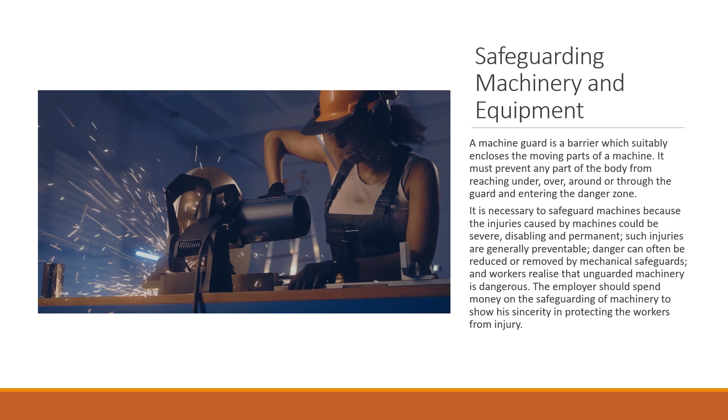Let's now take a look at the different classes and types of machine guards. There are two classes of machine guards: transmission guards and point of operation guards. And there are three types of guards: fixed guards, which do not move with each operation; interlocking guards, which prevent the control of the machine from being used until the guard is moved into place; and lastly, automatic guards, which prevent the machine operator from coming into contact with dangerous parts of the machine while it is moving.

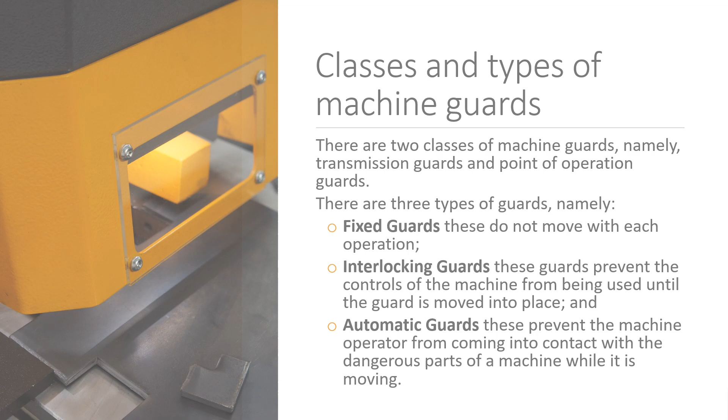When inspecting our machines as well as the machine guards, remember that machine guards should comply with the following requirements. They should afford the maximum protection possible. The danger zones should be blocked out during operation. The guard should be corrosion-free and fire-resistant. The guard should not produce splinters or pinch the operators. The guard should be fixtures of the machinery. The guard should not affect the efficiency of the machinery. And lastly, they should be strong enough to withstand normal wear and tear.

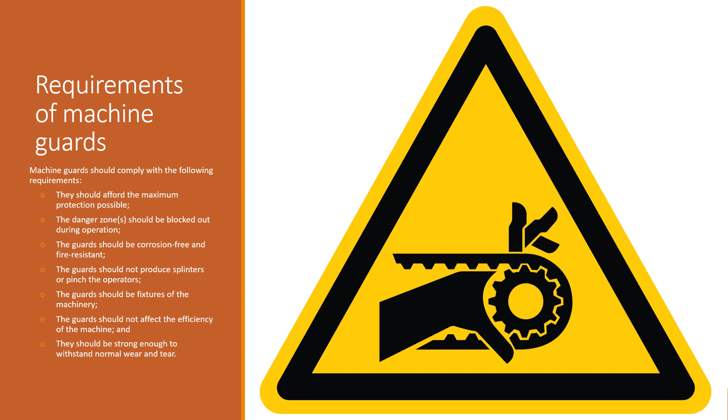Machine guards and safety mechanisms are designed to protect your hands and fingers. Never remove machine guards or bypass safety mechanisms. Check the lockout, tagout procedures before attempting to put your hands into machinery. Poorly maintained machinery, tools, sloppy work areas, and cluttered pathways all contribute to hand injuries. Good hygiene includes hand washing, which helps to remove germs and dirt from your hands. Clean hands are less vulnerable to infection and other skin problems, such as contact dermatitis.

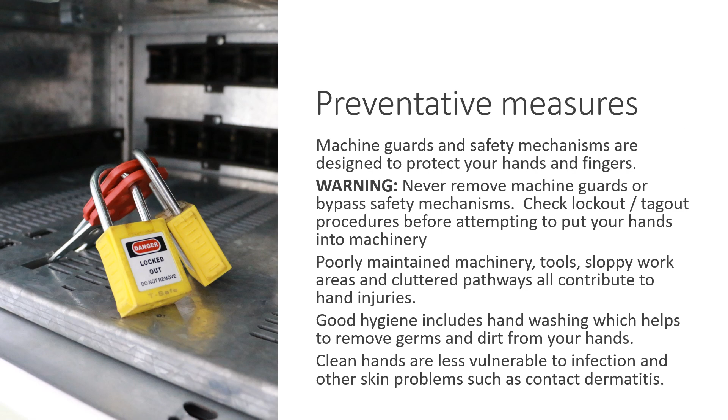Aside from electrically powered tools, you are often going to be using hand tools. Hand tools are multipliers of our strength, and they are like millions of willing hands working for our comfort. Primitive man had no tools but his bare hands. They caught his food, built his home, but one day someone discovered that with a stone fastened to the end of a stick, he could strike a harder blow than he could with his fist alone. From this beginning in prehistoric times, tools have been developed, enlarged and refined, but have never lost their importance.

However, hand tools are considered so simple that usually no one bothers to point out the right and wrong ways of using them, as well as how to take care of them.

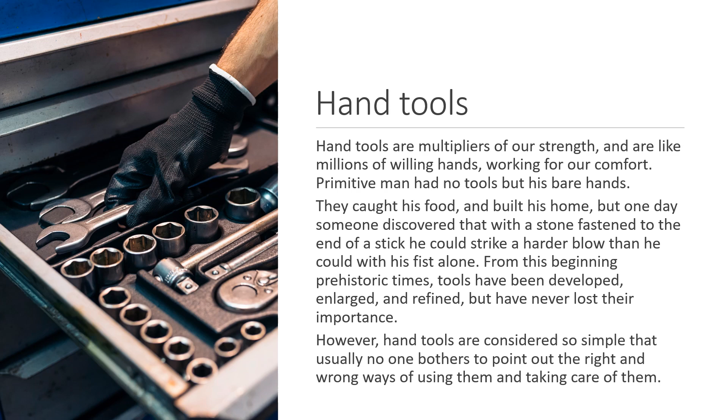Harmless as they look, they account for a surprisingly great number of compensable injuries in today's industry. Workmen have lost eyes or had vision impaired. Tendons have been severed. Bones have been broken. Arms, legs, and fingers have been infected through puncture wounds, all because of unsafe practices in the care and use of hand tools.

Hand tools normally do not have guards, and the workman must provide his own means of safety. He must know how to use his hand tools safely. He must know and practice the safety precautions that will protect him from injury. He must know how to check the condition of his hand tools in terms of safety in use.

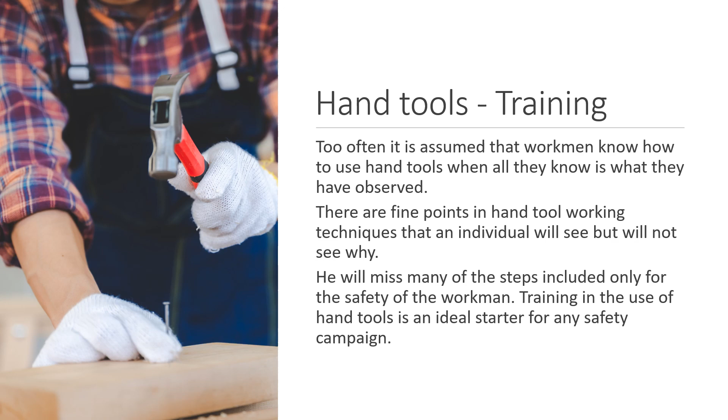This starts with proper training. Too often, it is assumed that workmen know how to use hand tools when all they know is what they have observed. There are fine points in hand tool working techniques that an individual will see but not see why. He will miss many of the steps included only for the safety of the workman. Training in the use of hand tools is an ideal starter for any safety campaign.

The slogan of this safety campaign is often, 'The right tool is the safe tool.' It is not uncommon to observe a workman forcing a nut onto a bolt with a pair of pliers, or using a screwdriver for a job that called for a chisel. Such unsafe tool substitutions are often responsible for serious hand injuries.

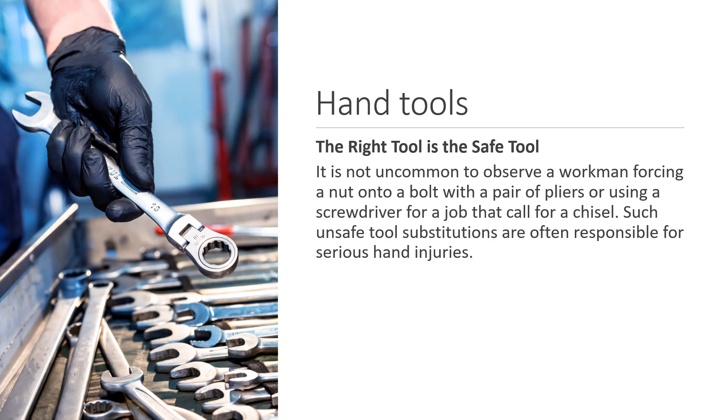Make sure to incorporate into your safety campaign of hand tools the provision for a tool maintenance procedure, as this is one of the most essential factors. Hand tools in the hands of many workmen over a period of time are damaged or badly worn in use and require careful and frequent inspection if their safe use is to be maintained.

When hand tools are not properly sharpened and dressed, injuries are often caused through insufficient cutting and glancing off the material being worked. A planned inspection time and place should be established and followed continually if an effective tool safety program is to be conducted.

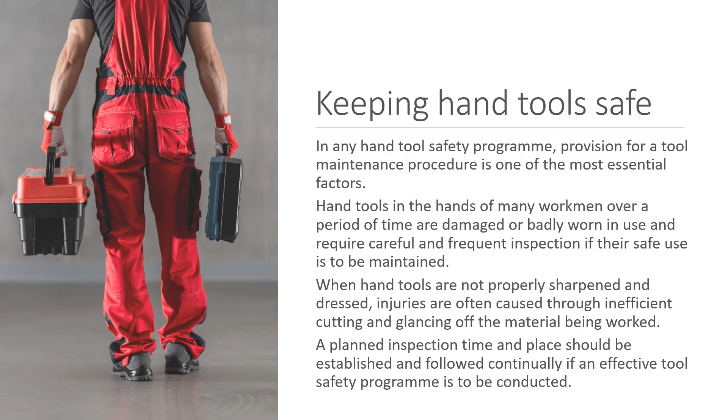All hand tools need safe handles. A workman's inefficiency and unsafe practices in the use of certain hand tools can often be traced to the handle of the tool. If it is too short, splintered, loose-fitting, or otherwise poorly affixed to the tool, the workman is exposed to possible injury.

The supervisor should be constantly mindful of their responsibility in seeing to it that all hand tools in their shop are equipped with safe, securely attached handles. With axes and sledges, a recommended safety practice is to install a steel band around the head and to bolt it to the handle.

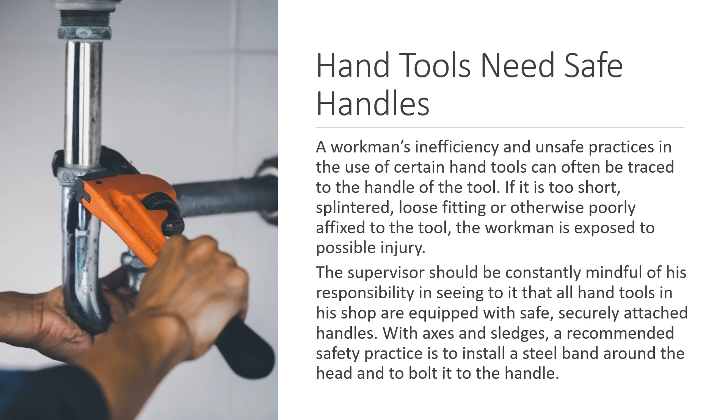In most cases, the safety of hand tools can be determined by the condition of its cutting and striking ends, particularly in the case of edged and pointed tools, such as cold chisels. A cold chisel with a mushroomed head is a common cause of injury to workmen. When a mushroomed head is pounded, there is danger that chips will be knocked off the damaged head and fly into the eyes of the workman.

Mushroomed heads on any hand tool should be redressed on an abrasive wheel. When the tips of screwdrivers are dressed, a file rather than an abrasive wheel should be used because the file draws less temper from the screwdriver tip. Loss of temper in a screwdriver soon results in a damaged tool and possible injury to the workman using it.

Definite and specific procedures in the safe maintenance of hand tools should be set up. Limits of wear, frequency of use, inspection guides should be established. An efficient program on keeping hand tools safe requires periodic inspections of all operations involving hand tools.

The tool supply room should be inspected at definite times. An inventory of hand tools should be maintained. Handling routines should follow a definite pattern. It is the supervisor's responsibility to enforce all planned procedures involving hand tool safety.

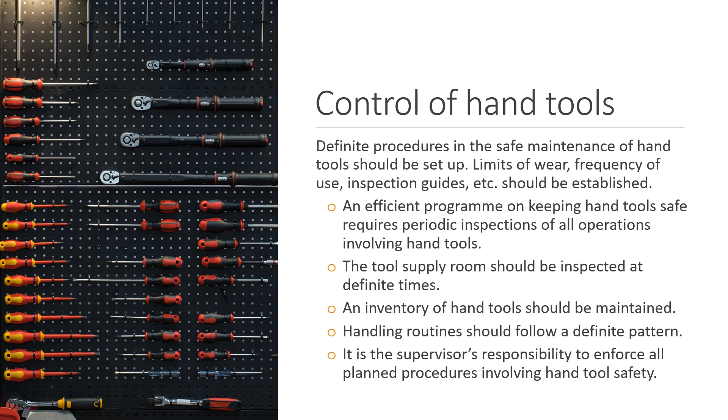The sharp tang of an unprotected file can make a painful and disabling wound. Keep plenty of good file handles on hand. See that there are securely fitted, substantial handles on each file you use. If any files have particularly sharp pointed tangs, round them off to avoid snagging your hand when reaching into the toolbox.

When filing, work close to the chuck in a lathe. File left-handed so your arm will not be snagged on your clothing or caught in the chuck, jaw, or dog. Never hit a file with a hammer. Pieces of the hardened steel are likely to fly. Do not make a center punch or a chisel out of an old file. The metal is too brittle for this purpose.

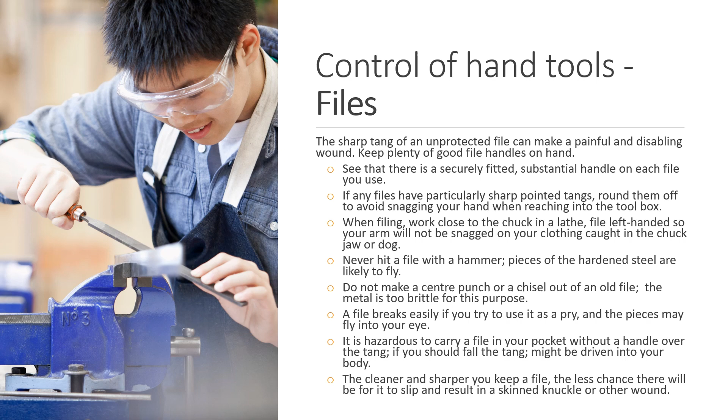A file breaks easily if you try to use it as a pry, and the pieces may fly into your eyes. It is hazardous to carry a file in your pocket without a handle over the tang. If you should fall, the tang might be driven into your body. The cleaner and sharper you keep a file, the less chance there will be for it to slip and result in a skinned knuckle or other serious wounds.

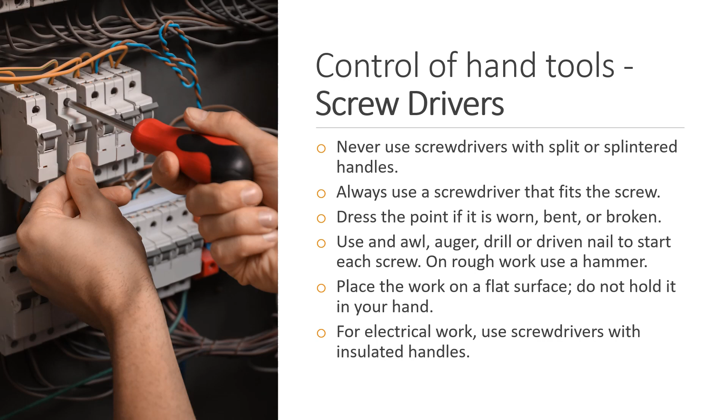Never use screwdrivers with split or splintered handles. Always use a screwdriver that fits the screw. Dress the point if it is worn, bent, or broken. Use an awl, auger, drill, or driven nail to start each screw. On rough work, use a hammer. Place the work on a flat surface. Do not hold it in your hand. For electrical work, use screwdrivers with insulated handles.

Wheelbarrows seem harmless, but they might be dangerous, and often they are troublesome to handle. Here are some suggestions. Avoid using a wheelbarrow with cracked or broken handles, damaged or wobbly wheels, loose legs or ragged edges. Keep the wheel axle bearings well oiled. Balance all loads carefully, placing the center of the weight well forward to save lifting strain. Lift chiefly with your leg muscles, keeping the back nearly upright.

When wheeling heavy loads, take special care if the load should tip not to be caught by the handles. See that plank runways are well supported and not able to shift or tip. If wheeling loads across portable apron bridging any open space, make sure each time that the bridge is securely in place. Watch for insufficient clearances.

Wear gloves if necessary to protect your hands. Never run with a wheelbarrow. This leads to serious stumbling and falling injuries. Do not leave a wheelbarrow in a position where it may tip over or where persons or traffic may run into it.

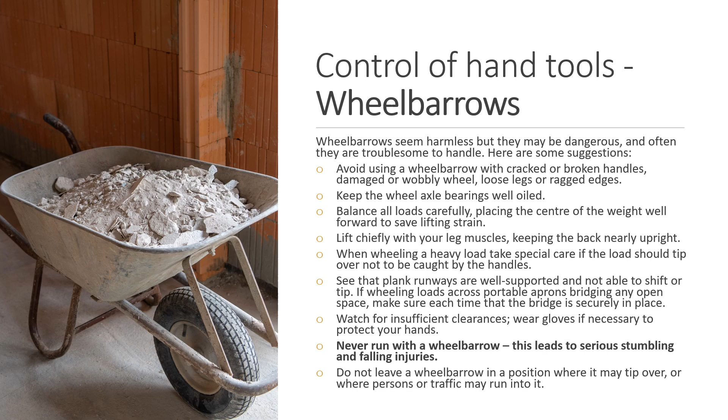Many hands have been broken, fingers smashed, and knuckles skinned as a result of workmen striking their hands against door jambs, columns, piles of material, and other objects while handling trucks and wheelbarrows. This is why it is important to have knuckle guards to protect your hands from crushing injuries.

Just as foils are used on swords and sabers to protect the hands, circular discs can be used in many different ways in industry to afford similar protection. When placed on the handle of a pinch bar or car mover, a disc will prevent the hand being crushed if the bar slips. When used on a chisel bar, a disc will reduce the danger of injury to the hand if the hammer misses the head of the bar. On steel used for sharpening knives, a disc is also an effective guard.

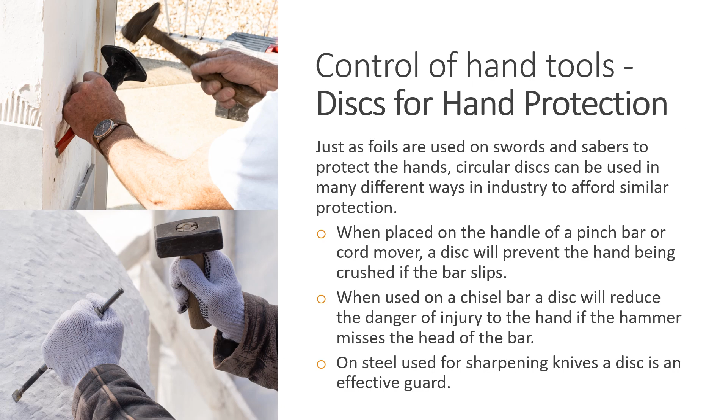Here are some important things to remember for tool keepers. Issue only tools that you know to be safe. Permit no tool with a mushroomed head to leave the tool room. Have all cold chisels, chisel bars, cutters, and other shock tools with bad heads dressed before they are issued. Keep the jaws of wrenches in good condition and warn workers about misusing them.

Keep all sharp-edged tools sharp. Keep the edge protected while in storage. If any tool shows signs of being improperly tempered, withdraw it from service, try to find the trouble, and have it corrected. Portable electric and pneumatic tools should be kept in the best possible condition. Check frequently the condition of switches and control valves, electric cords, and hose connections.

If a grinding wheel has been abused, give it the ring test. Know the safe speed and how to mount and adjust the wheels. Store grinding wheels so they cannot be abused. When using goggles, make sure they are suitable for the work and that they fit comfortably.

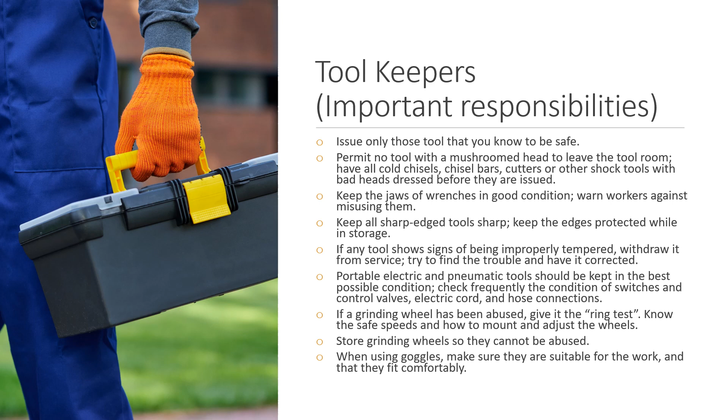From behind the wall-plug in your workplace, an invisible servant is always available to speed up and make your job easier. This servant is electricity, a most convenient and powerful source of energy. You can see or hear this invisible energy in action when it lights up a bulb, starts an electric motor, or boils the water in your kettle.

Electricity is a must in progressive industrial development, but it unfortunately has certain inherent disadvantages. It can cause fatal accidental injury when the current passes through the human body, or it can start fires that destroy property and claim lives.

Despite these characteristics, more and more appliances are developed and marketed to assist us in doing a better job. Electricity has become so commonplace that we take it for granted. Just the flip of a switch.

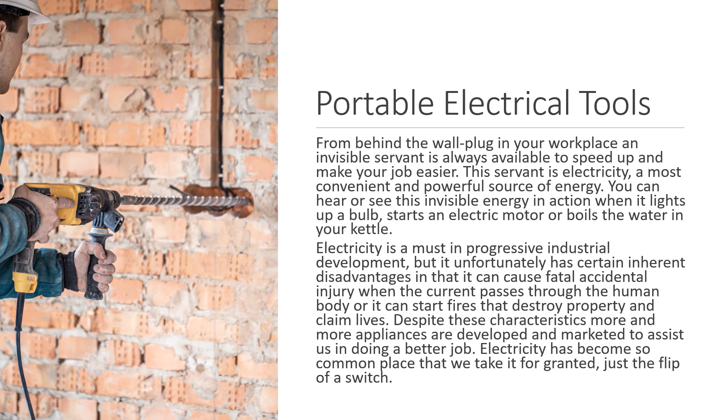There is no doubt then that we must keep portable electrical tools safe. All portable electric tools are equipped with an electric cord. Defective cords, defective plugs, and defective extension cords are the most serious single cause of electrical shock.

Attachment plugs present safety problems in their normal use, and the hazards are twofold. One lies in the numerous fine wire strands of the conductor which are affixed to the plug underneath the screw. As the screw is tightened, these fine strands tend to push forward through being compressed, and these wandering strands may come in contact with those of adjacent conductors or with the prongs. More often than not, the earth wire is completely pushed out by the action of the screw, thus discontinuing the earth contact or causing the earth to touch the live or neutral wire and energize the hand tool.

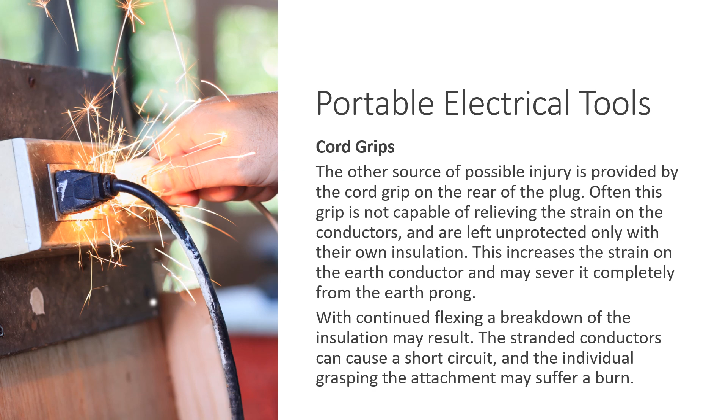The other source of possible injury is provided by the cord grip on the rear of the plug. Often, this grip is not capable of relieving the strain on the conductors and they are left unprotected with only their own insulation. This increases the strain on the earth conductor and may sever it completely from the earth prong. With continued flexing, a breakdown of the insulation may result. The stranded conductors can cause a short circuit, and the individual grasping the attachment may suffer a burn.

Electrical injuries, though, can be prevented by using one of the following approved devices: an earth leakage, a double wound transformer, high frequency current machines, or double insulation. Earth leakage protection is a device, if introduced into the electrical circuit, which switches off the current immediately a leak to earth of between 5 and 20 milliamps takes place.

The device works on a principle that all the electricity fed to the appliance goes along the live wire or conductor and returns via the neutral wire, also a conductor. If through faulty installation or poor workmanship, some of the electrical current escapes to earth via some conductor, which could be the human body, the line and neutral currents are not in balance and the switch will trip instantly. These devices can be fitted to the meter board or can be portable.

It is considered good, safe practice to maintain the normal earthing system through 3-pin plugs of all electrical equipment and to check at regular intervals for earth continuity.

Double wound transformers. This alternative requires one double wound transformer between each hand tool and the mains. The secondary winding may not be earthed. This means that twin conductors only are required, and the hand tools should not be earthed. It is portable and can be used anywhere. It seldom, if ever, requires maintenance.

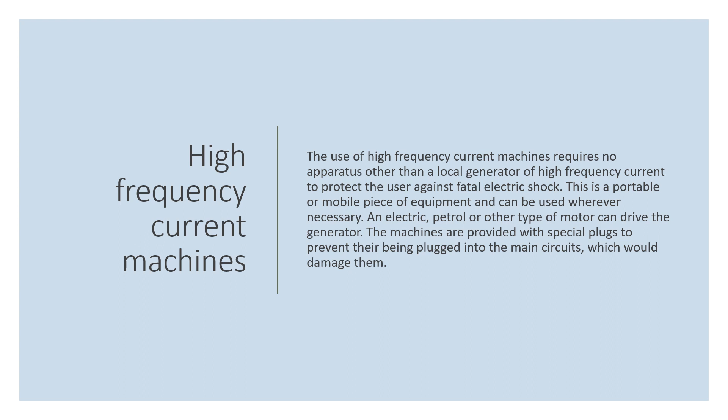Double insulation. New machines are supplied with double insulation between the rotating and static parts of the machines. This does not require any other apparatus or equipment to protect them and doesn't need to be earthed. A twin conductor, 2-pin plug only, is all that is required. The international sign for double insulation is a double square. Single or 3-phase machines with double insulation are available and may be plugged directly into the main supply plug.

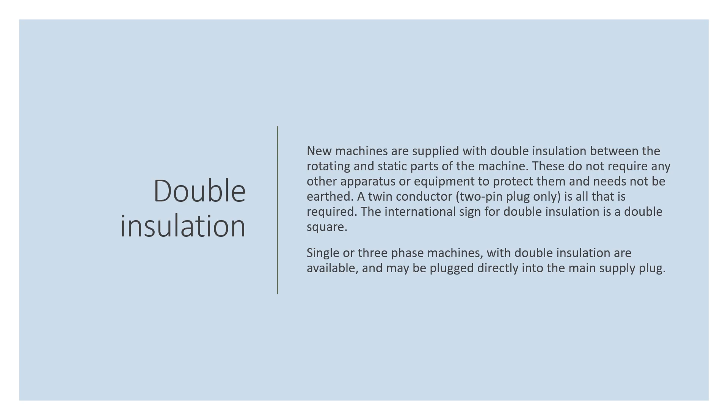Always inspect a cord before using it. Discard cords having damaged or cracked insulation, and switch off before unplugging it from the socket. Remember to remove a plug by the grip and not by pulling on the cord.

Now, what can cause a live chassis? Many things can cause the current to charge the frame of the hand tool. Water in the switch, carbon from the motor brushes, broken or loose parts in the case of the motor or switch, defective insulation of the motor windings, loose cord connections in the tool or plug, worn or defective cords.

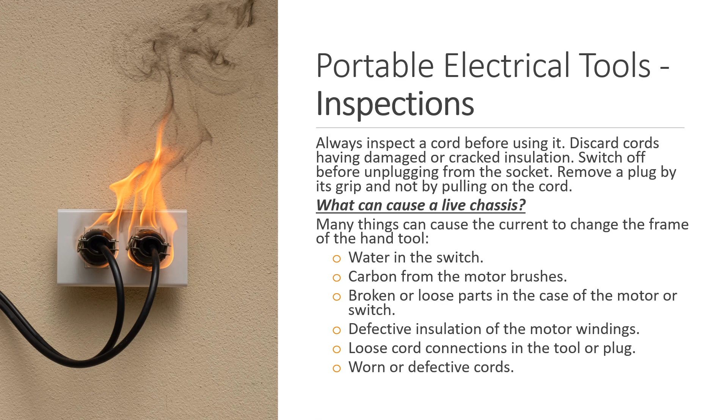If you touch an electrically energized object with dry, calloused hands while standing on a dry floor, you may only feel a slight tingle, but make the same contact with moist fingers while wearing damp shoes and standing on a wet surface, and your resistance may be low enough to provide a lethal shock. It is not the amount of electricity in a circuit that causes death. What matters is the amount of current surging through the vital parts of your body. If the voltage or pressure is great enough to overcome the body resistance, the result is a fatal shock.

Any shock from 15 milliamps or more current can kill a person. A tiny 5-watt bulb draws 50 milliamps of current. Even that low current drain is more than enough to kill a human. There have been no recorded deaths from electric shock on circuits of 12 volts or less, such as found on doorbell transformers and furnace thermostats. But death has been known to result from a circuit as low as 46 volts.

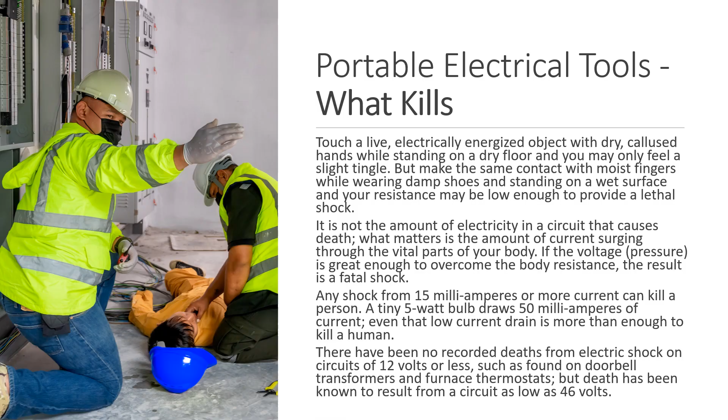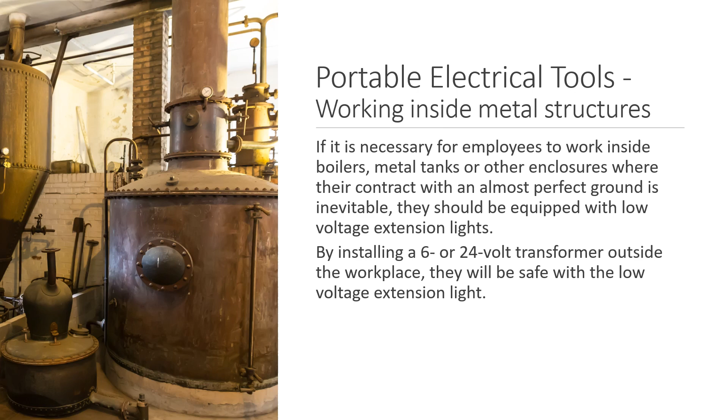If it is necessary for you as an employee to work inside a boiler, a metal tank, or other enclosures where your contact with an almost perfect ground is inevitable, you should be equipped with low voltage extension lights. By installing a 6 or 24 volt transformer outside the workplace, you will be safe with a low voltage extension light.

Extension cords in particular need continuous, careful attention. The following suggestions are made. Keep connections tight. Inspect regularly for earth continuity and correct wiring. Replace rather than repair cords with defective insulation. How do you handle them? Do not support cords on nails. Do not place near heaters. Don't run under the carpets. Do not string cords across walkways, and do not overload extension cords.

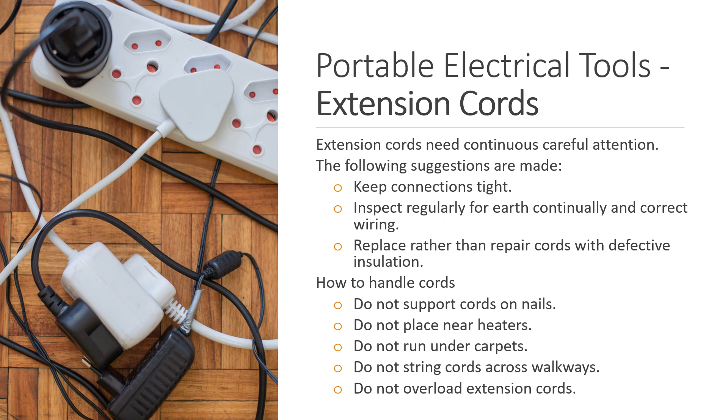Of vital importance in the safety of extension cords is inspection and maintenance. Make a specific person responsible for the regular inspection of all portable electrical hand tools. Number all appliances to identify with a suitable mark and list all appliances in a register. All defects are to be noted in the register, and tools must be sent for repair when required.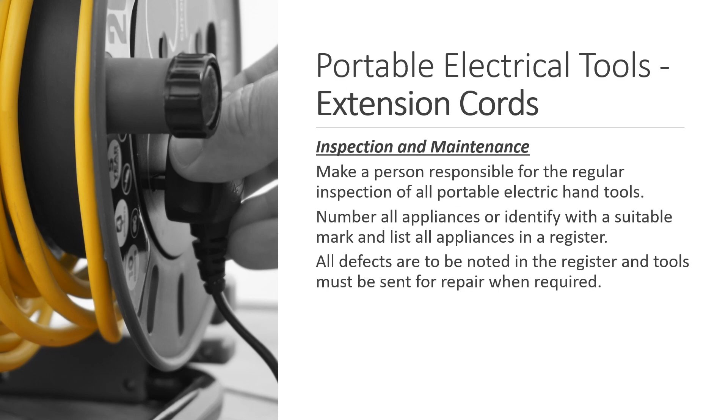Abrasive wheel makers take all possible precautions to supply sound wheels, and various methods are used in their construction to reduce the risk of breakage. In spite of these precautions, though, breakage may occur in service due to a defect caused by subsequent misuse or handling. Bad storage, incorrect selection of a wheel, improper mounting, excessive out of balance conditions, excessive speed, grinding machine defects, and malpractice in grinding operations are all factors that can result in breakages.

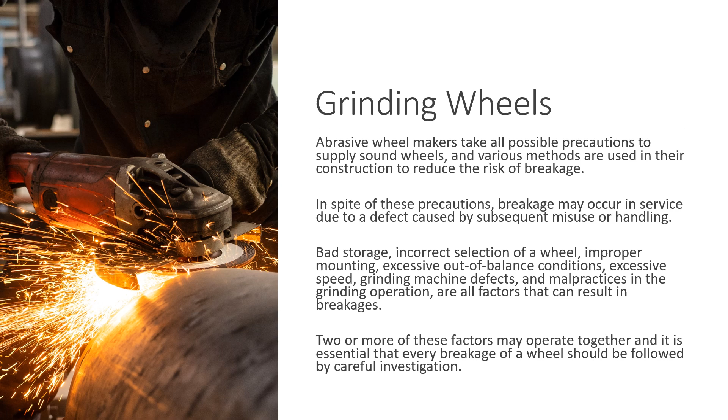Two or more of these factors may operate together, and it is essential that every breakage of a wheel should be followed by careful investigation. Ensure that wheels are carefully unpacked, cleaned with a brush, and examined for possible damage in transit. The soundness of a vitrified wheel can be further checked by suspending it vertically and tapping it with a light, non-metallic implement. This is known as the ring test. If the wheel sounds dead, cracked, it should not be used.

Often, wheel breakage can be attributed to carelessness, improper handling, and poor storage. Wheels damaged from these causes may appear perfect, yet present a danger to operators. So prevent dropping and bumping of the wheels and never roll the wheels around. Correctly store and maintain all wheels and ensure that you use the machine correctly.

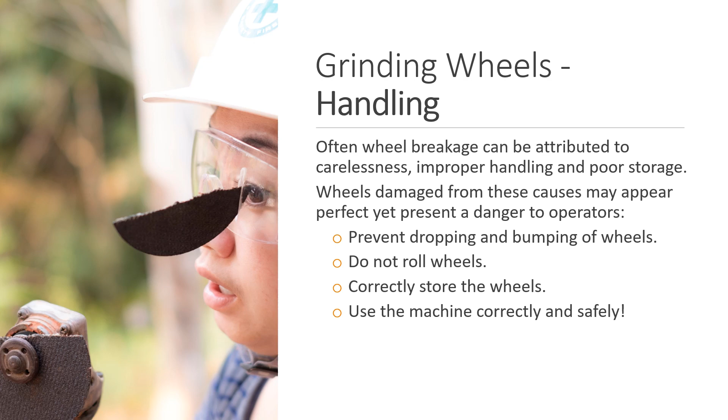When storing any grinding wheels, ensure you have suitable racks, bins, or drawers to accommodate the various types of wheels that you are using. Most plain and tapered wheels are best supported on edge or on central supports. Where the wheels are placed on edge, the support should take the form of a cradle to prevent rolling, with a sufficient number of partitions to prevent wheels from falling over. Thin resinoid, rubber, or shellac wheels should be laid flat on a horizontal surface and away from excessive heat to prevent warping.

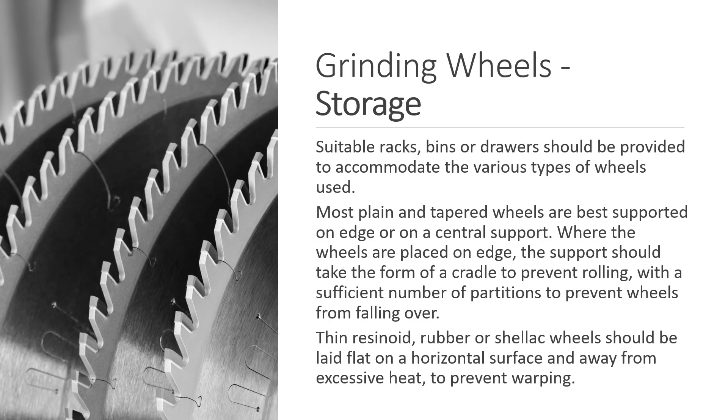Abrasive wheels should be mounted on the type of machine for which they are intended. This appears to be an obvious precaution, but accidents still occur when wheels are mounted on homemade apparatus quite unsuitable for the work. Likewise, accidents are caused by heavy and medium wheels being fitted to spindles designed to take only the lightest of wheels. As a result, vibration is excessive and breakages occur.

On no account should an abrasive wheel be screwed onto the taper spindle of a buffing machine. This dangerous method of mounting is very likely to result in the breaking of the wheel owing to the wedging action of the tapered spindle. Floor standing grinders should be heavily built on good foundations. Bench grinders should be securely anchored to a stout bench.

As a rough and ready rule in the selection of wheels, soft wheels are preferred on hard material and hard wheels on soft material. With wheels of unsuitable structure for the job, loading may result. That is, the abrasive wheel face becomes clogged with particles of the material being ground. A wheel may also be either too hard or too fine, resulting in glazing. The operator is then forced to use excessive pressure of work on the wheel, a contributing factor to wheel breakage.

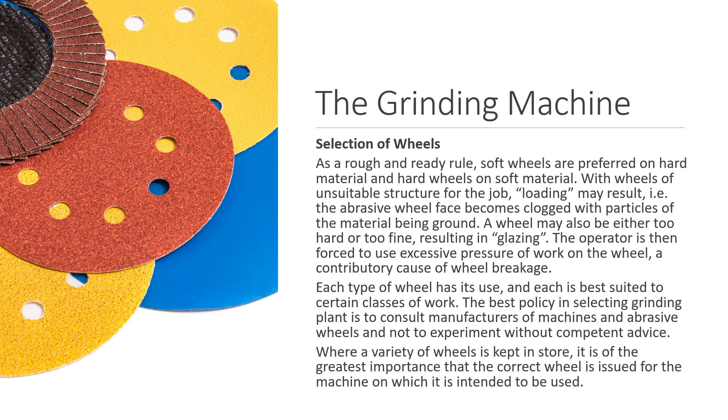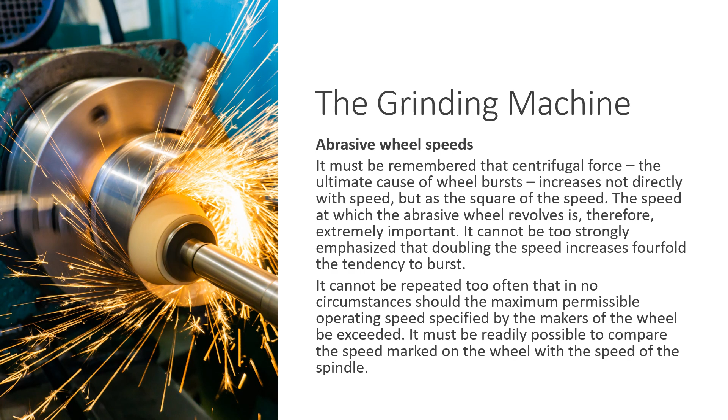It must be remembered that centrifugal force, the ultimate cause of wheel bursts, increases not directly with speed, but as the square of the speed. The speed at which the abrasive wheel revolves is therefore extremely important, and it cannot be too strongly emphasized that doubling the speed increases fourfold the tendency to burst. Again, it cannot be repeated too often that in no circumstances should the maximum permissible operating speed specified by the makers of the wheel be exceeded. It must be readily possible to compare the speed marked on the wheel with the speed of the spindle.

The spindle itself should also be of adequate diameter and made from steel of suitable quality. When the wheel is secured by means of a single central spindle nut, the thread should be such that the direction of tightening the nut is opposite to the direction of rotation of the wheel. The spindle should be of sufficient length and threaded to a sufficient extent to ensure that when the wheel and flanges are mounted, the thread extends inside the flange but not into the hole in the wheel.

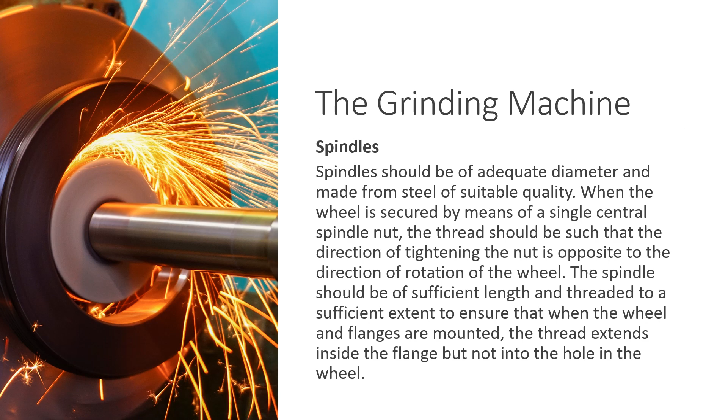Ensuring that you have a good solid work rest is also very important. Work rests should be of substantial construction, readily adjustable to follow wheel wear and be securely clamped to the machine. The rest should be kept adjusted as close as possible to the wheel face or side to prevent the workpiece from getting between the wheel and the rest, which would result in the risk of jamming and breakup of the wheel. The necessary adjustments should not be made with the wheel in motion. All rests should be examined periodically and maintained in a good condition.

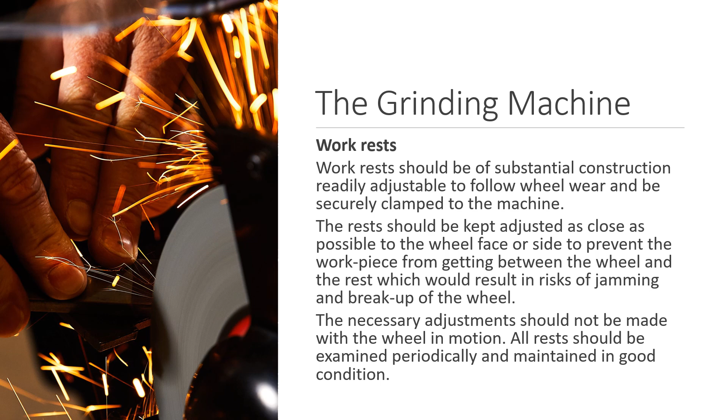When the wheel slows down as the work is applied, flat spots tend to develop which lead to bumping of the wheel. In addition, the operator, to compensate for loss of grinding efficiency, may exert greater pressure and thus add to the stress of the wheel. Belt slipping or a driving motor of inadequate power may be contributing factors as well.

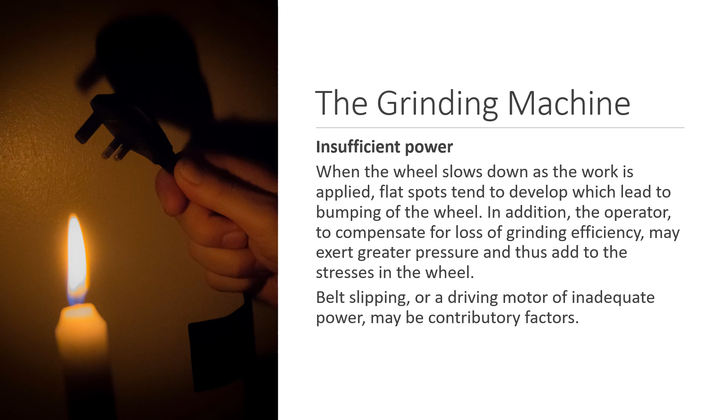It is important that the means for starting and stopping grinding machines should be placed in a safe position and within reach of the operator. The electric cable should be in good condition, and unless the machine is of the double insulated type, it should be properly earthed.

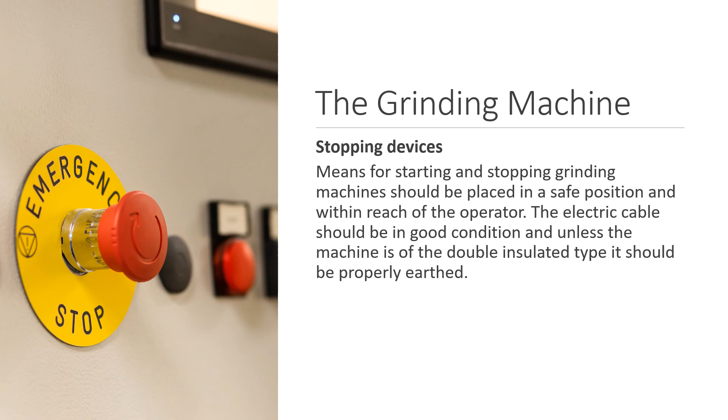To restrict flying particles to the smallest possible area, to protect the operator in case of accidental breakage, and also prevent accidental bumping and cracking of the wheels, grinders should be equipped with adequate safety guards. Metal guards of adequate strength, covering the entire wheel except the actual point of operation. Removable side covers, which are always replaced after adjustments to the wheel.

Transmission guards covering all drives and belts. Permanent eye shields of perspex or safety glasses in position above the point of operation. And these also must be kept clean and unscratched and always in the correct position. Hinged flaps covering work surfaces when the machine is not in use.

Even if a grinding machine is equipped with all possible safety devices, grinding is still a hazardous operation and certain operating safety rules must be observed. Cup goggles with safety lenses should always be worn, even if a permanent face shield is fitted to the machine. Grinding contact should be made without bumping or impact. When the machine is switched on, it should be left running idly for a full minute while the operator stands aside.

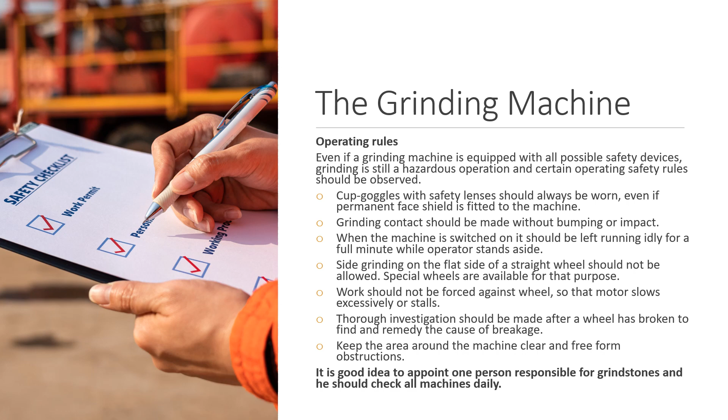Side grinding on the flat side of a straight wheel should not be allowed. Special wheels are available for that purpose. Work should not be forced against the wheel so that the motor slows excessively or stalls. Thorough investigation should be made after a wheel has broken to find the cause and the remedy of the breakage. Keep the area around the machine clear and free from obstructions. It is a good idea to appoint one person responsible for grindstones, and they must check all machines every single day.

Have you noticed someone in the area of work not wearing the correct PPE because they are only observing, or they are standing in the area but not performing the work, and so PPE does not apply to them? The Machinery and Occupational Safety Act of 1983 states that the user shall cause a notice to be posted in a conspicuous place at every power-driven grinding machine, prohibiting persons from carrying out, inspecting, or observing grinding work without using suitable eye protection.

The user of a power-driven grinding machine shall cause such machine to be marked in a conspicuous place with the manufacturer's rated speed or speeds of the spindle in revolutions per minute.

Portable electrical equipment can be fatally dangerous. All portable electrical equipment should be suitably identified and recorded in a portable electrical equipment register. Inspections should include items such as cable and extension leads, domestic and even office equipment, and other appliances that draw power from a socket outlet. A trained person, in other words, a competent person to do the work, should be given the responsibility for checking the equipment at routine intervals and then recording the findings in a register.

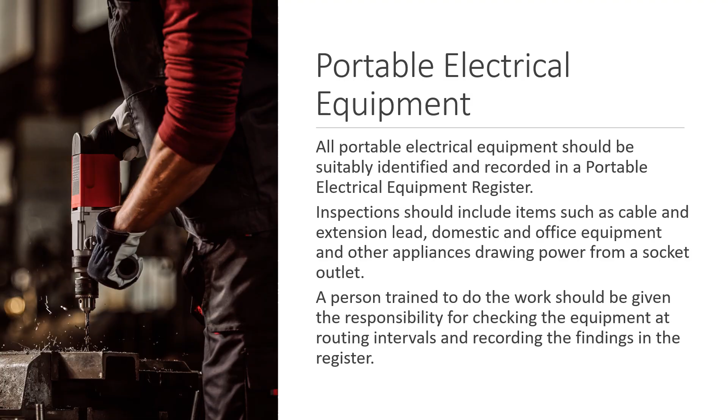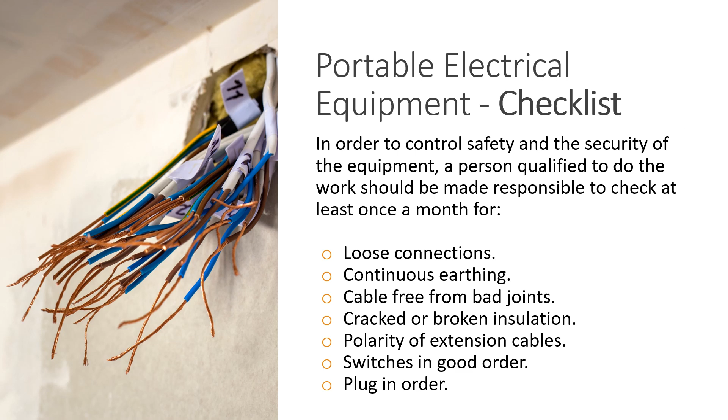In order to control the safety and security of the equipment, a person qualified to do the work should be made responsible, obviously appointed in writing, and at least monthly check for the following things: loose connections, continuous earthing, that the cable is free from any bad joints, any cracked or broken insulation, polarity of extension cables, that all switches are in good order, as well as the plug being in good order.